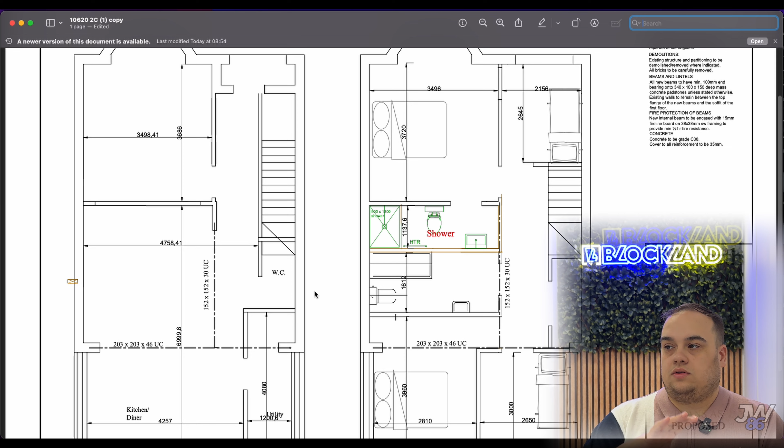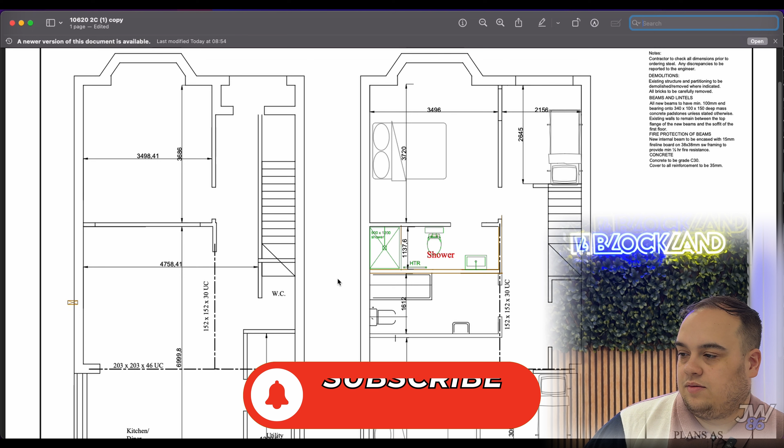So as you can see here, these are architect's drawings, and this will show what concrete you should use, what steels you should use, lintels, demolitions. It's basically your working drawings effectively. So it'll give you all the dimensions just here, there, and then this one is where there's going to be a steel just for support. As you can see, there's a big one there, but you'll get a more in-depth breakdown beyond this for more structural calculations that are included, pad stones being explained, what size and what size steels, and if there's any breaks.

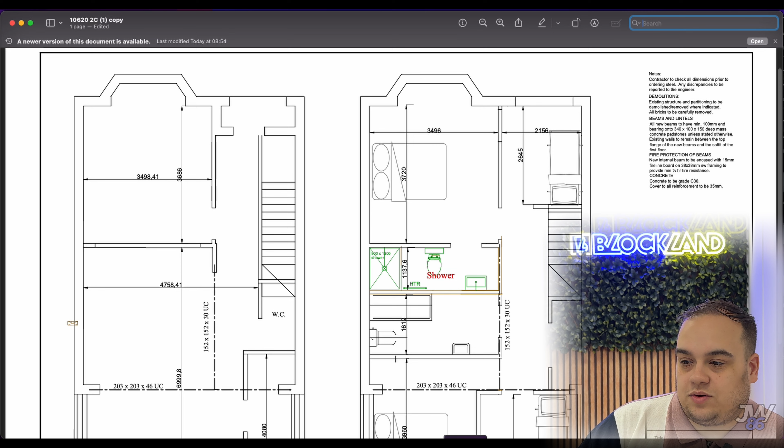Your shower room or your ensuite room and your bathroom. And yeah, this is something I really like at this stage. As you can see here, 203 welded to the HTM flange using 4mm. So that makes more sense to a builder to me.

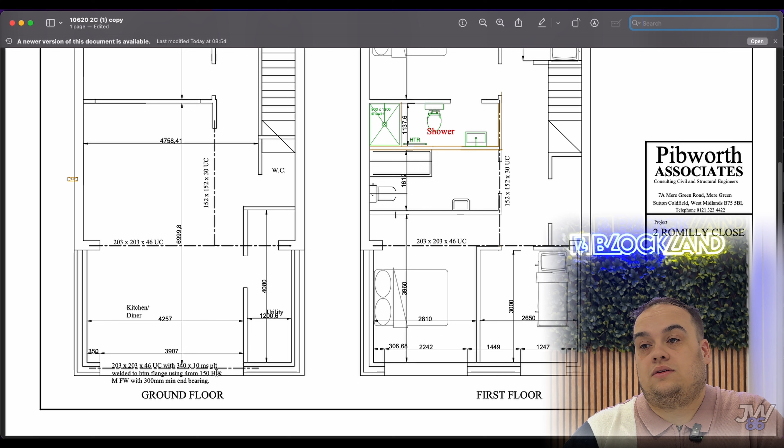But yeah, I thought it'd be good just to show you something that I've been working very closely with someone on, of doing the project. So it's a very, very exciting one.

Just for the numbers, this house was purchased for 175,000. It'll have about 100 grand spent on it for the spec that it needs to go to because of the area that it's in, and your end value will be 425 to 450,000. This will flip extremely easy.

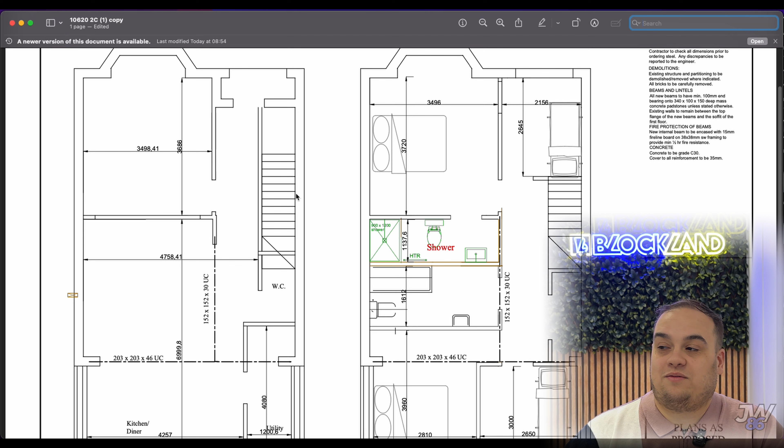The main reason it'll flip so easily is just because of the location. The location is fantastic. I'm going to blur out the address, but this house is fantastic.

So guys, I hope that was a little bit of an insight as to your architects and structural drawings, and I hope it gives you something to go off of. From this you can then work out your shower sizes, what shower tray, what bath, where your toilet and sink are going, so it gives you an idea of how things are going to get laid out. Master bedroom here, little 3/4 bedroom or single room there, again single room, double room.

But yeah, I've been to this house a couple of times. The location is unreal. Guys, I hope that was a little bit of an insight as to what it is before you get into a project and some of the things that you have to take into account.

I thought I would just fill you in after I spoke to the party wall surveyor this afternoon. The party wall surveyor gave us the news that there is only a 4-inch, basically one brick width in, so there's only one wall. It's not a double skinned wall, it's just a single skin wall in between both properties.

So now that can cause issues when trying to take out a chimney breast and the way you should be supporting the stack. Oh, a tree fell down here and all, it just hit the stack. How you should support the stack that's out of the roof.

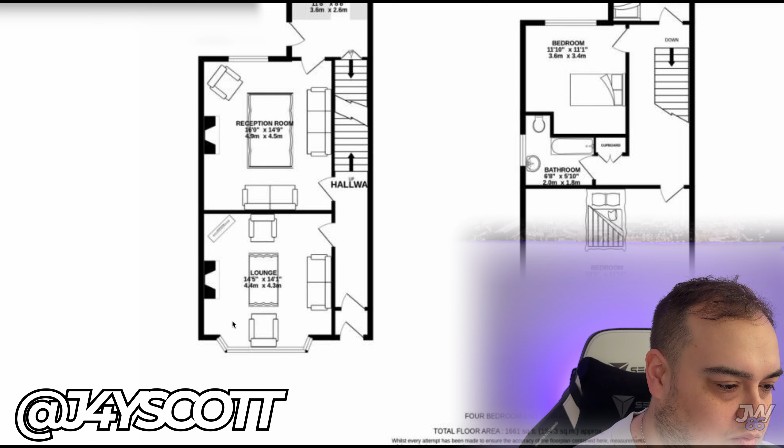But this is the main game changer. So as you can see, each room is 4.4 by 4.3, 4.9 by 4.5, 2.6 by 3.6 by 2.6, and then you've also got the garage as well. Again, another considerable size room, with the bathroom in between, that I'm not so keen on. So this is why I have come up with a concept after another big room there.

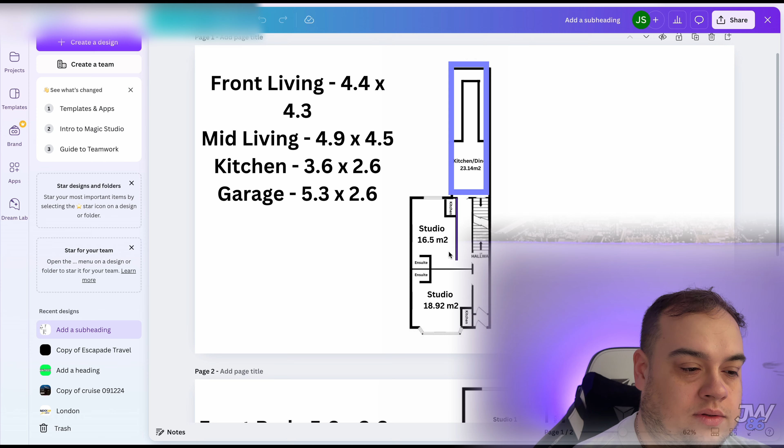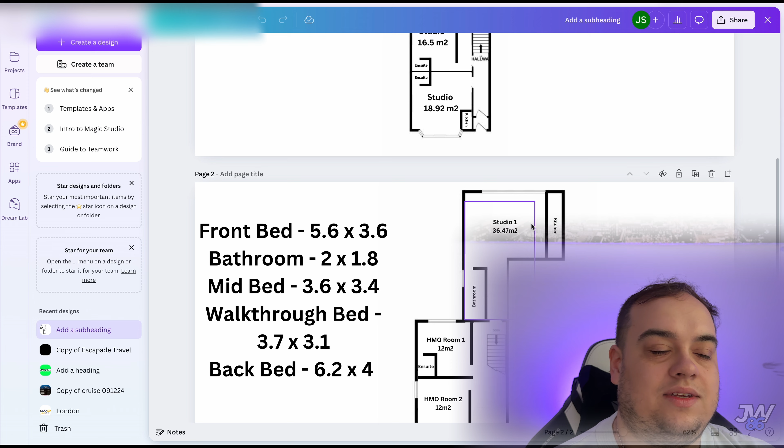So as you can see, studio, kitchen, diner, and that's for the use of the HMO rooms. Again, another studio upstairs - bathrooms, en-suites, kitchen, so on and so forth, you get the gist. They're all above minimum size standard. This could actually be very close to becoming a fully sized flat. The minimum size for a flat is 37, that may have changed now so I'll have to double check that. But if you're ever stuck for amenity size standards, just search for the local council that you're dealing with.

Say amenity standards - so for example, if you're looking in Walsall, which is Article 4 next year, you can then just say Walsall HMO amenity standards, and it'll give you the stuff for HMOs. Then it'll give you self-contained units, which is effectively kitchenette, ensuite, and a big enough size room. It'll give you the size for studios, bed sits, and flats. So it'll give you everything.

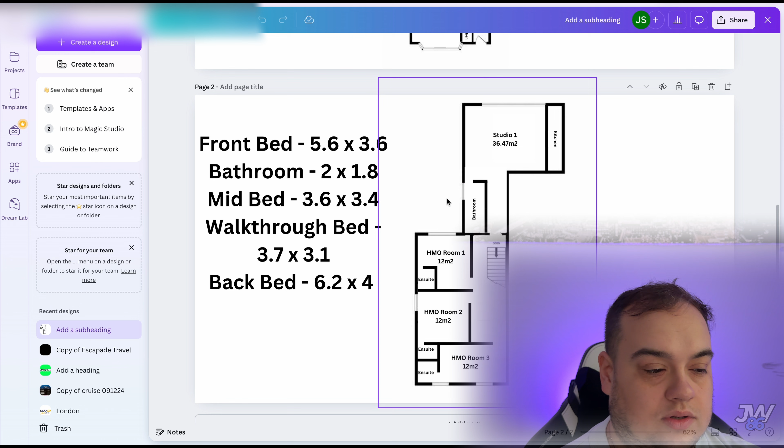So that's why I put a studio here. Again, as I just said, that could become a fully fledged flat if there's some space you could nick from somewhere, just to get that 0.5 metre squared. But an architect would confirm that anyway. And then again, HMO room, HMO room, HMO room, 12 square metres. Now, a typical single occupancy room will be 6.51 metres squared. An ensuite, 2.5 to 3.5 square metres, again depending on how much space, how big shower trays, all of that jazz you want in there.

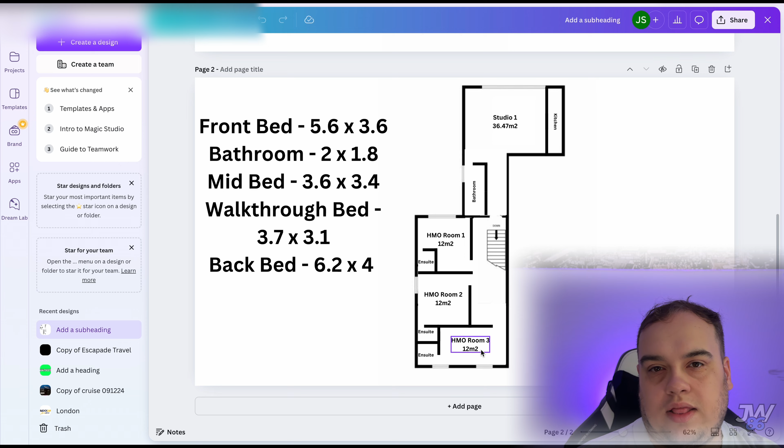12 square metres will give you just below a double occupancy, but will give someone who's living there a big enough space for them to feel comfortable, with a double bed, desk, wardrobes, and their own en-suite as well. So you wouldn't necessarily have to give them en-suites, but then you'd have to find somewhere to put the bathroom - you'd probably end up putting it somewhere like underneath the stairs, or in the kitchen, at the bottom end of the kitchen dining area. Again, it all comes down to what the architect would give you best.

So the main tips for finding HMOs is making sure it's got the floor space. Again, you can check that on the EPC register - put in the postcode, select the address. Typically 110, 120 square metres is about where you want to be.

That'll give you roughly 10 square metres per room, about 20 to 25 for the kitchen dining area, and maybe even a little communal space as well. This is a council that will give you kitchen diner, which is classed as your communal space, and because there's only 3 HMO rooms, you can play around with the configuration, and it could play benefit when it comes to the end value.

Now, I'm not going to get into commercial valuations, as I'm in no way, shape or form qualified to give you guys advice on it. All I know is that having a mixture can play benefit on the multiples that you get, based off your income per annum. But I'm not going to sit here and say commercial valuations are what you are going to get, as there's numerous factors you need to take into consideration before you tell an investor or buy a property expecting to get a commercial valuation.